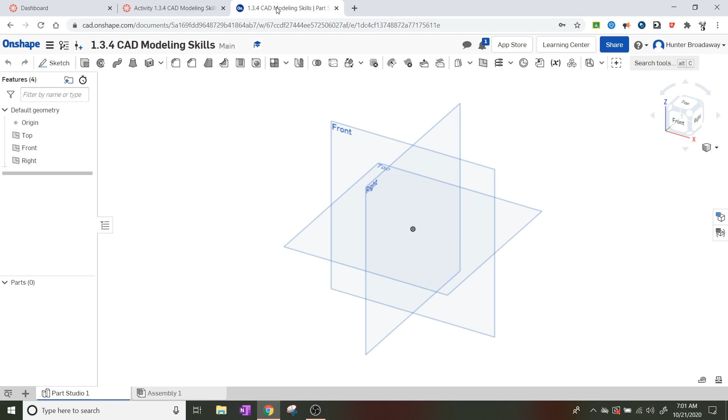It says a 4-inch vertical by 6-inch horizontal rectangle. So we're going to go to sketch mode, go to the top, make sure we're actually clicking on the top plane, top view. I'm going to make a rectangle, just any rectangle, and we're going to make it 6 across and 4 vertical, a 4 by 6 rectangle like this.

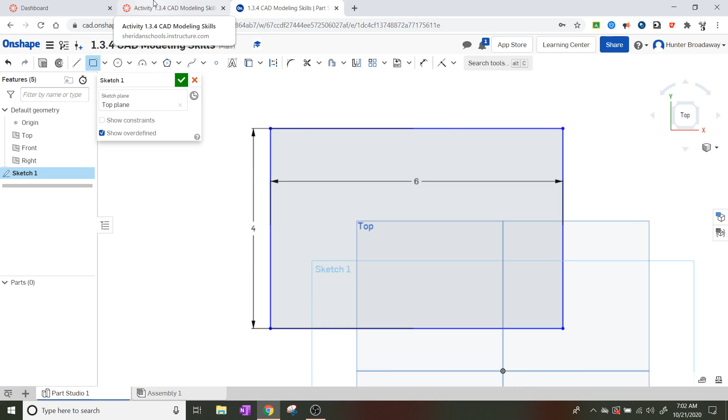I'm going to hit, let's see if they want us to sketch anything else before I hit the green check mark. See what we got here. Looks like they want us to, oh yeah, if we use a center point rectangle, normally in Fusion 360 it will create 2 sets of construction lines automatically.

I don't believe that actually works the same in Onshape. Let me go ahead and check real quick. You can click the center point rectangle by clicking the button on the rectangle tool right by it, then moving down to center point rectangle. I'm going to try this. Yeah, see, whenever you create a center point rectangle in Onshape, it doesn't give you those nice fancy construction lines like it does in Fusion 360, unfortunately.

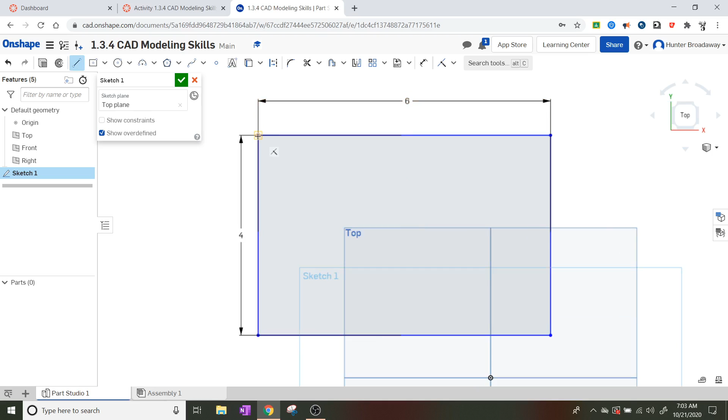So we're going to have to add those in. I guess we'll use the line tool, and we'll go from corner to corner, click, click. Hit escape to get out of the line tool, and then right click on each of the lines and select construction. You don't actually want them as part of the rectangle, but we do want them there because we're going to be using them later on.

So now we have 2 construction lines set up, and we're going to create polygons. Polygon, if you remember from geometry, is just some kind of segments that connect together back, a closed loop. It looks like we're just making some regular polygons, which means all of the sides are the same. Fortunately, there are ways to make polygons that have all the same side.

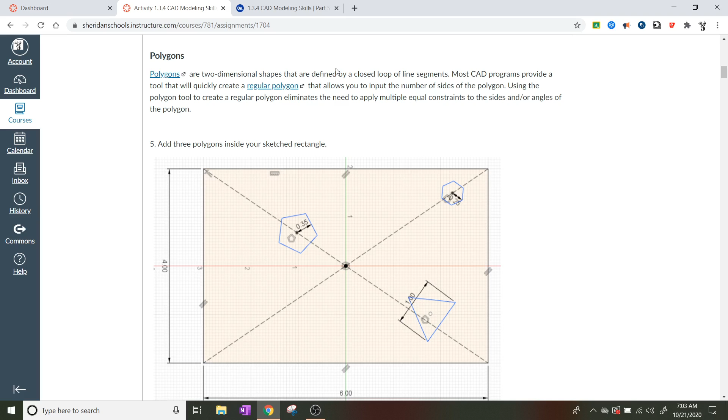So we're going to add 3 polygons inside of our sketched rectangle. Here we go, in Onshape this is how we're going to do this. Our polygons, and it looks like they want us to do just 3 of them. I guess it just says inside your sketched rectangle, so we can put them anywhere we want to, I guess.

So here's inscribed polygon and circumscribed polygon. Fortunately for us, it actually gives where the circle is for the inscribed polygon and where the circle is for the circumscribed polygon.

So what you'll be making is an inscribed polygon, let's go ahead and try that first. I'm going to click on that one, and then click and move my polygon out.

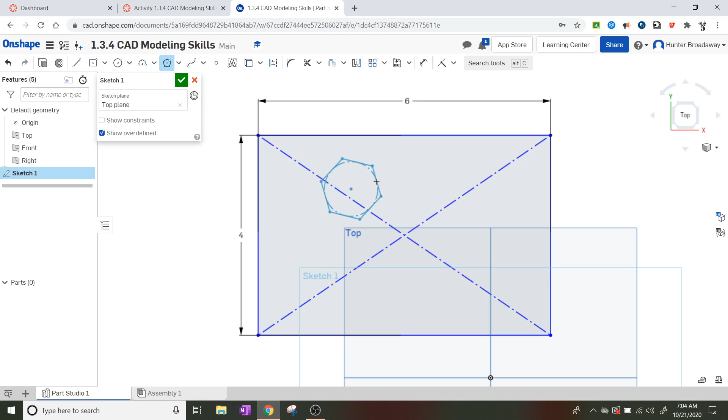If you have it set to certain areas, you can see there's a dashed line right here. This would automatically add a coincident constraint to the polygon. If you don't want that, make sure you don't have it snapped in place like that.

So I'm going to click right here. Once you click once, you can move the mouse wheel up and down, and it will tell you how many sides your polygon's going to have for that inscribed circle.

The circle is on the inside, and if I add more sides, this polygon becomes more and more like a circle because you're having more equal sides to it. I'm just going to use 5, a pentagon. I'll click on that, and that's an inscribed pentagon.

So we're going to now do a circumscribed polygon, where the circle is on the outside. I'm going to make a circumscribed polygon, and I'm not going to snap it into place, although you could easily get it to snap.

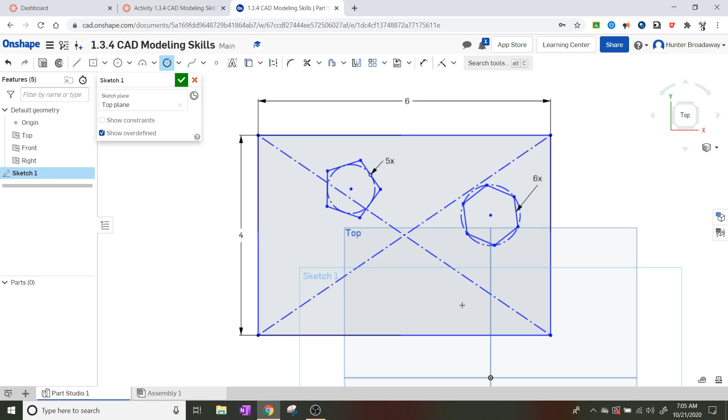So I'm going to click right here, and I'll keep it at 6 sides—don't move the mouse up or down, just click—and we'll have a hexagon right there. I'll make one more, click, and move the mouse down to make a triangle.

So we'll have 3 polygons here. Two of them are circumscribed—the triangle is circumscribed because the circle is outside—and one is inscribed because the circle is inside. Inscribed inside is how I usually remember it. Circumscribed is when the circle goes around, making a circumference around the polygon.

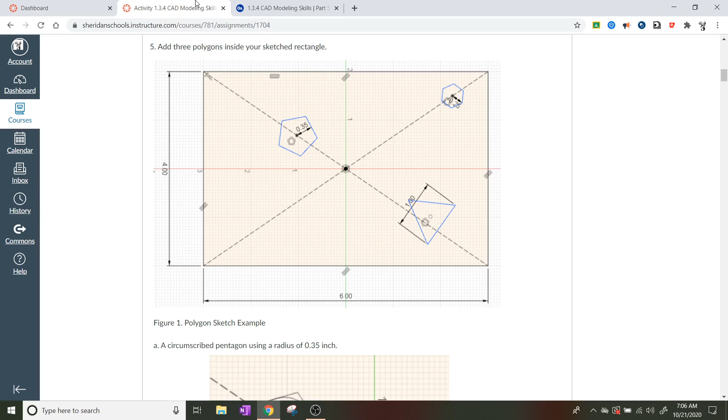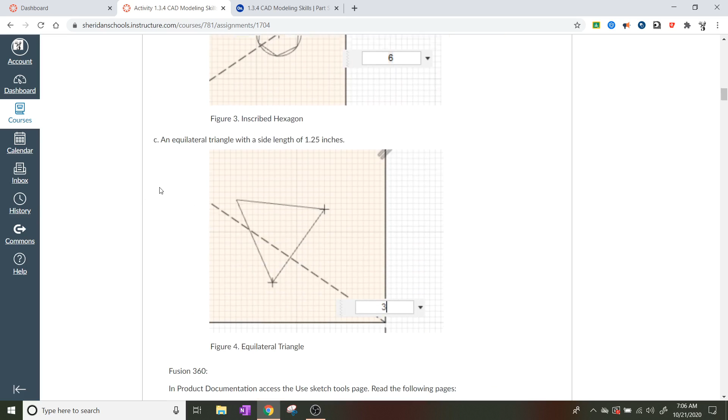So let's see what else it wants us to do, since we've got the polygon tool. Looks pretty cool and works out okay. Let's see, a circumscribed—oh hey, look at this. So this is just a couple of examples. We've already done these, so for A, B, and C, those are done, no big deal there.

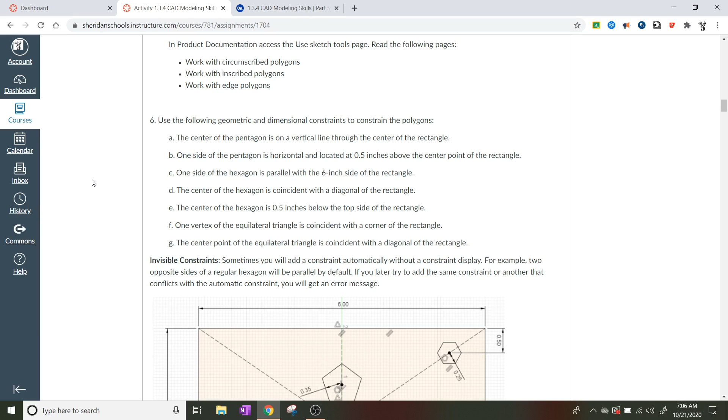Use the following geometric and dimensional constraints to constrain the polygons. So we're going to add constraints to make sure they fit inside the sketch as shown. For A, the center of the pentagon is on a vertical line through the center of the rectangle. It doesn't say exactly where on the rectangle yet, but we're going to put it on the center.

Let's make a construction line. I'm going to hit the line tool and go to the very middle where it snaps into place, then click on the other side. Hit escape to get out of the line tool, right click, go to construction, and you've got a dashed line right there.

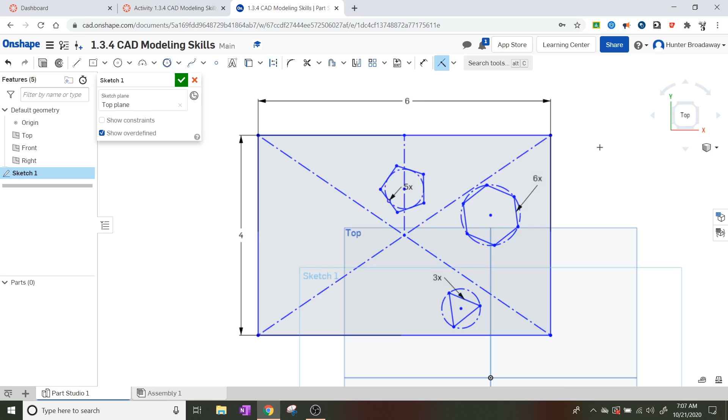Now we can apply our constraint. I want this on the line, so I'm going to use the coincident button. I'll click coincident, click here in the center of the polygon, then click on the line, and that's going to move my pentagon to the center of the rectangle vertically.

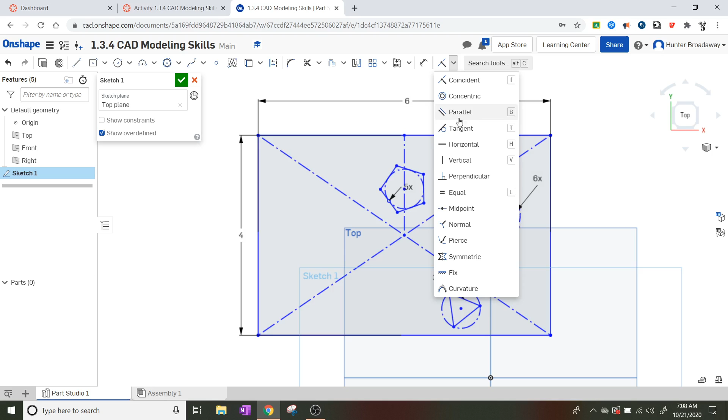Next, one side of the pentagon is horizontal and located 0.5 inches above the center point of the rectangle. So one side is horizontal—let's find the horizontal constraint. I'll click on the constraint button, go to horizontal, click on one of the sides, and it should go into place. None of this is locked down right now, so if it moved around, that's okay.

We're going to add another constraint too, because it needs to be 0.5 inches above the center point of the rectangle. Remember, we can use the trick from last time—if you want the rectangle locked down, we can use the coincident constraint on the center of the rectangle, or just use a corner if you wanted to.

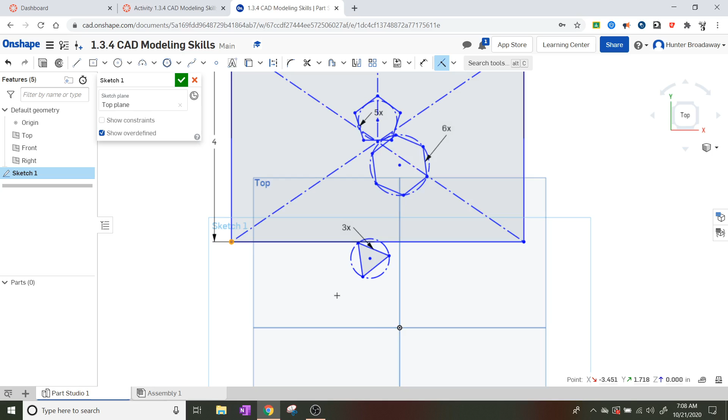So you can do a coincident constraint and then click on the origin, and it'll lock it in place, so it's not going to start moving around everywhere. You'll also notice the border around the sketch is now black, which means it's locked in place.

Okay, so we now can make a horizontal constraint. I can click and move this up out of the way. Since it's not really constrained, it's in blue, so I can move it around in any direction. I'm going to click the dimensional constraint, click the horizontal line, and click the center of the rectangle. I think it said 0.5, so I'll type in 0.5, and that looks reasonable.

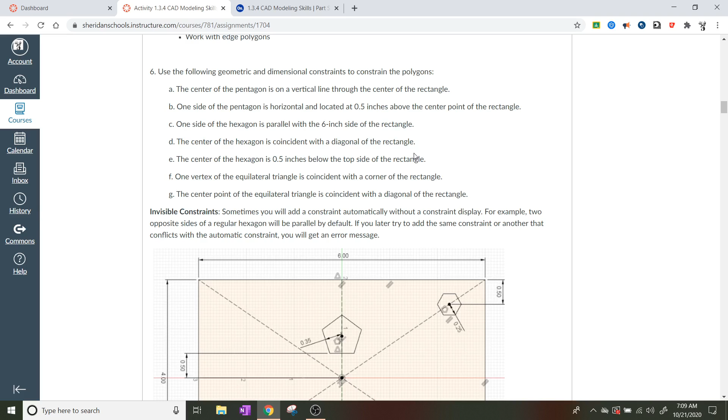Let's see here. One side of the hexagon is parallel with the 6-inch side of the rectangle. So we're moving on from the pentagon - we're going to be on the hexagon on the right side. One side of the hexagon is parallel with the 6-inch side of the rectangle.

Okay, well my hexagon is all the way over there, so let's take this guy and move it over. Oh no, look, it accidentally constrained itself over on this side - I have a small problem. You can see there's a coincident constraint right here. I can just click on that constraint and hit backspace, and it will go away. I did not want to have it there, but sometimes it does things you don't want it to. Okay, now I really do need you to go away this time.

All right, did it work? Okay, interesting, we're going to hit show constraints, and it looks like here's the one I want - it's the one on the point right here. I'm going to right click - I don't want to delete that, I just want to delete it using the backspace button. That should go away. I should be able to click and drag, and it really doesn't want to go anywhere. That's kind of disturbing.

Looks like I've got another coincident constraint up here - it's really locked into place. You know what, worst case scenario, I can just make another hexagon. I don't need you, hexagon, I can just take another one whenever I want. Oh man, okay, so this one really doesn't want to go anywhere, it's like stuck - even if I delete the constraints, it's like, well, we're just gonna stick around.

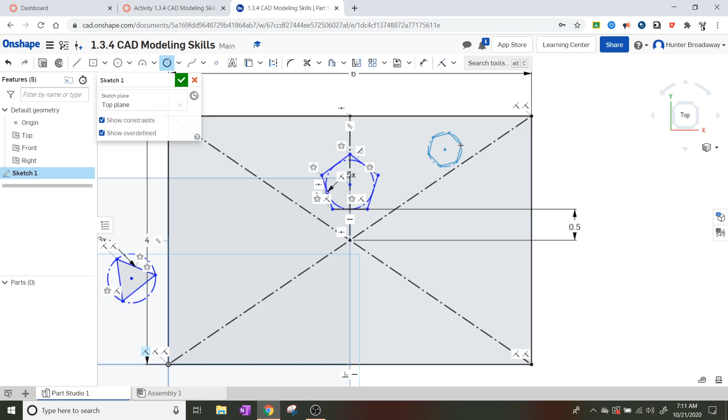I ended up deleting my constraints all the way around, so I'm just gonna go back up here, and it looks like it's just gonna be easier to create a new circumscribed polygon. Whoop, hey look, a hexagon - I just kind of made that right there. Boom, okay, back to the program.

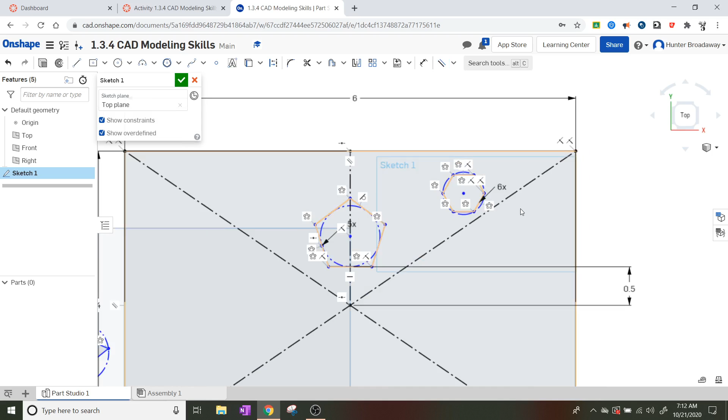We're going to - I think it said it was parallel - so we're going to click the parallel constraint, and then make one of these sides parallel to the rectangle, like that. Sometimes it's beneficial to show the frustrations people have with 3D modeling, because sometimes things get constrained and Onshape or Inventor automatically assumes that's where you want to put it, but that's really not where you wanted it. So frustrations happen in that case, and that's normal for this kind of stuff, unfortunately.

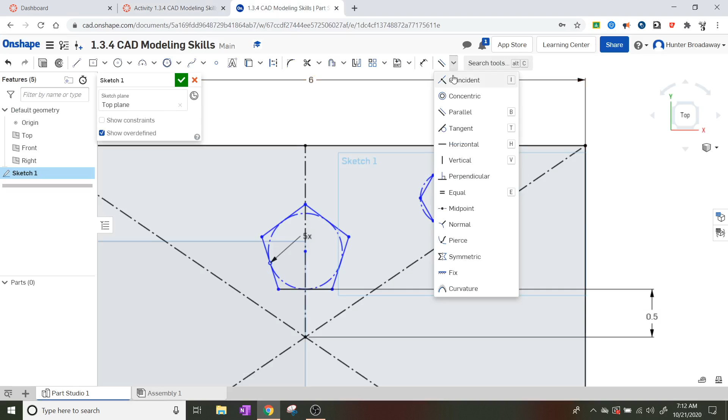Okay, so it says for the next one, the center of the hexagon is coincident with the diagonal of the rectangle. So I'm going to go back, click the coincident constraint, click the center dot, and click on the diagonal part, and now we have it coincident with the diagonal.

And if I click this and drag it, the hexagon shouldn't break itself apart, but we haven't set how big we want the hexagon to be, so we can move this anywhere we want. If we click on this point, we should be able to move the hexagon, but it's only going to be able to move on that diagonal line. It's not going to be able to move anywhere else.

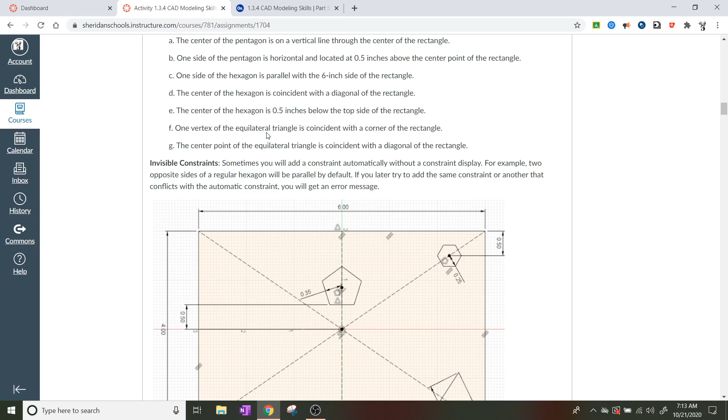Okay, so we're going to go for the next one. Let's see. The one vertex of the equilateral triangle is coincident with the corner of the rectangle.

Okay, well it said coincident, so let's use the coincident constraint. We're going down to the triangle. Oh God, where'd it go? We're going down to the triangle over here. Why are you locked in? What are you locked into? Okay, whew.

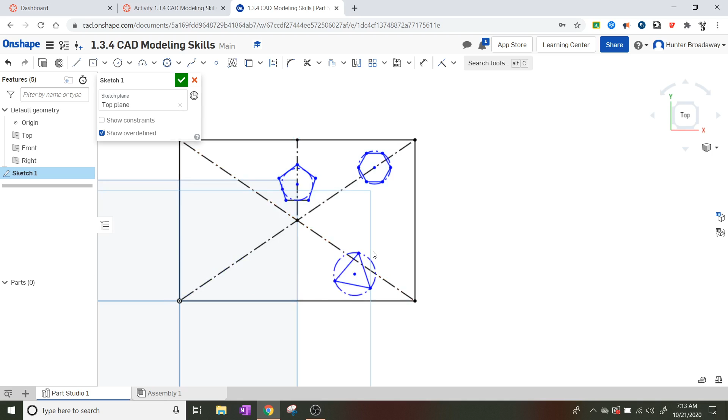The triangle, we're going to make this have a coincident constraint. So we're going to click coincident, and click one of the edges of the triangle. We're going to click the corner, and it'll just kind of pop into place down there. So now that triangle can move around, but this corner is stuck in place, so it's not going to be able to go anywhere else. If I click that and drag it around, I can move this triangle, sure, but it's pivoting around this area. So we've kind of got it stuck.

Do be careful, because if you are playing with this and you snap it into place, you're going to create a coincident constraint that you did not mean to make. So when you're moving these things around, be careful because 3D software is going to try to predict what you want it to do to try to save you time, but sometimes that is not time saving.

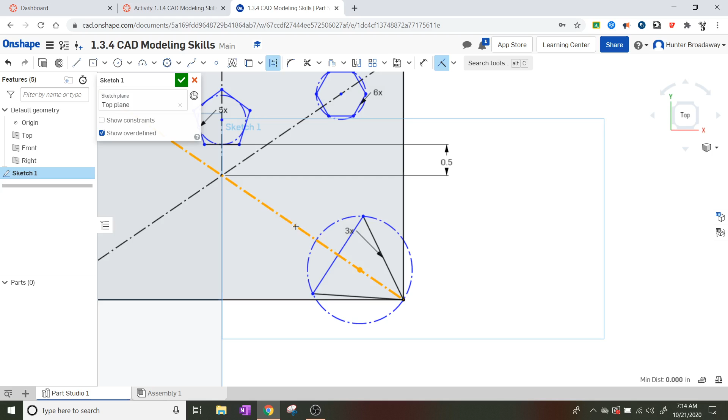Okay, so let's see here. The center point of the equilateral triangle is coincident with the diagonal of the rectangle. Okay, so all we need to do now is do the coincident constraint. We're going to click the center of the triangle, and we're going to click on the diagonal of the rectangle, and we now have our constraints put into place. We are in the right spots, I hope.

Okay, so we've got all of those constraints done. These look reasonable as long as we have the right sizes. I think we'll go ahead and put the sizes of the rectangles, dimension them in place. I think we can do that too, so that way we'll be consistent with what we have on our rectangle. So the last thing I'm going to do is make the triangle have a side of 1.25.

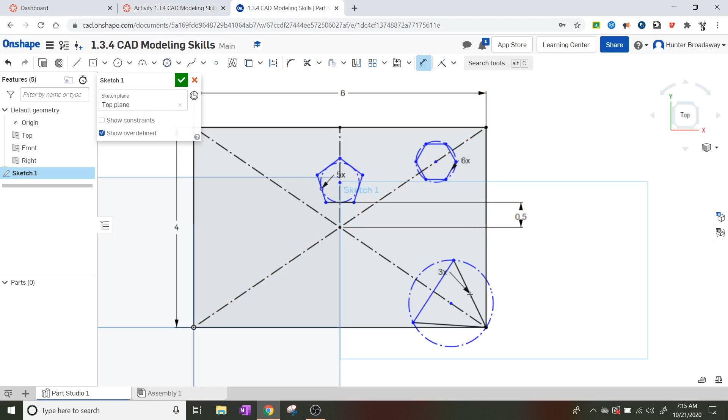So I'm going to hit the dimension button to dimensionally constrain this. And we're going to say that that has 1.25. Click. Okay, that was actually pretty close, actually.

Then we're going to do the hexagon with a 0.25. So I'm going to click dimensional constraint. We're going to go down to this bottom part. I'm going to do 0.25. We'll have a little hexagon.

And the pentagon is going to have 0.35. So dimensional constraint. Go out to one of the vertices. Looks like I didn't hit dimension. Sorry. Dimensional constraint. Click, click, and then we're going to type in, I've already forgotten what it was, 0.35. 0.35, enter. Okay, so we've got a little pentagon, we've got a little hexagon, and we've got a not so little triangle. Okay, and it looks like we are pretty much good to go.

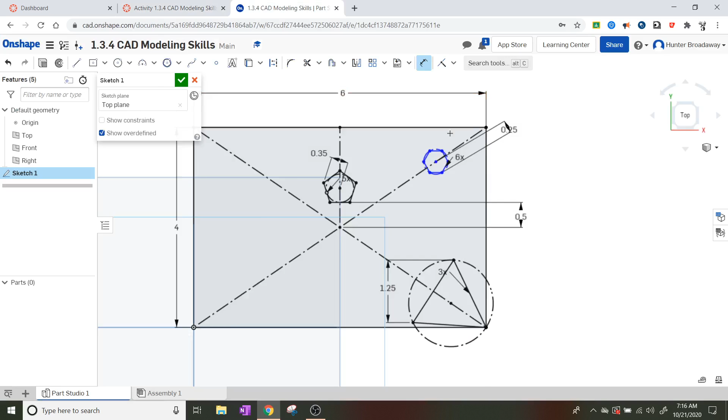I think if we wanted to, there's one more constraint - this one is black, this one is black, but the hexagon isn't quite black yet, so there's probably a little bit more that we could do to constrain this in place. Let's see what we've got. I think the only thing that can happen is this thing can just move up and down. And I notice that the actual lengths don't change anymore because I set them to 0.25.

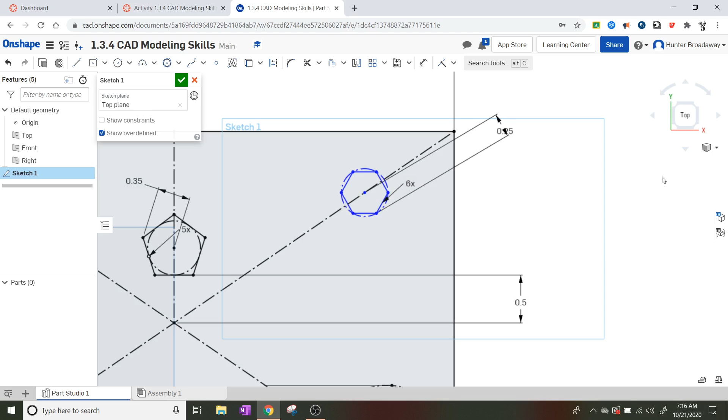I think we're going to leave it there, though. I think we're just going to leave that in place so that it can move back and forth. I may regret that later.